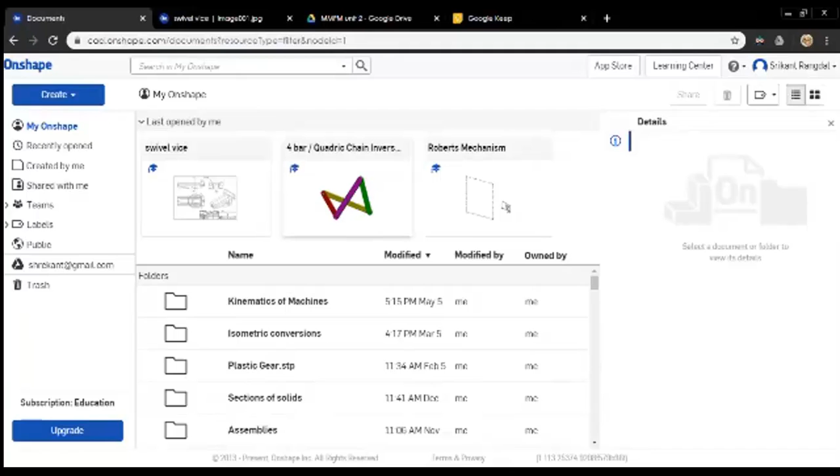But later on, since AutoCAD is not a parametric software, the students were unable to move these mechanisms and see how they move. That is what put me on a journey to discover better methods and software that are not only capable of showing students how objects behave in 3D, but also allow them to interact with it and model with complete functionality wherever they want.

And that's how I came upon Onshape. Now, Onshape is a software developed by the same people who developed SolidWorks. They left SolidWorks - Dassault Systems is the company which developed SolidWorks. So these people actually worked for Dassault Systems developing SolidWorks before they left the company and started their own venture, called Onshape.

So this is the software that you can see. I have opened a small model called a 4-bar mechanism. Now in the textbook, this 4-bar mechanism is shown by 4 sets of lines joining at corners. But the students are unable to see how to operate it - that's where this software comes to our help.

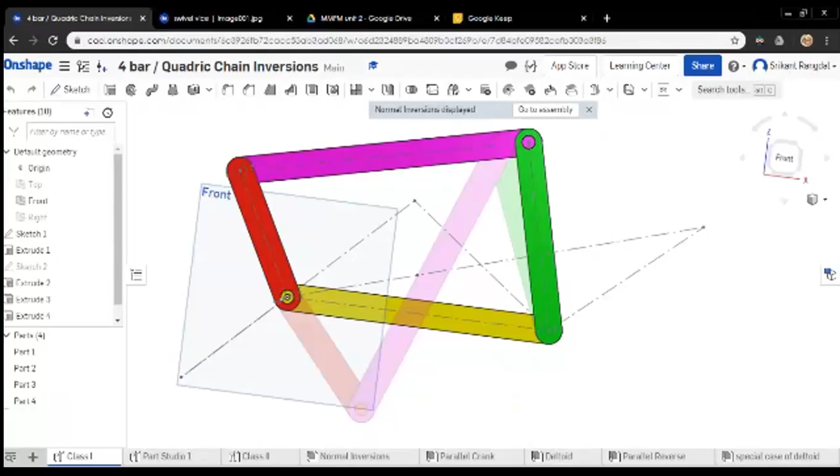I think in the video it's not clearly visible - the names are not visible, but you can make out where they are on the screen.

If you make an account, similar to making a Gmail account, just by filling a small form, you can go to onshape.com and sign up. You'll be presented with a form to fill, and a free account for Onshape will be created for you. There's also an app you can use on mobile, downloadable from the Play Store or Apple's App Store, and you'll be ready to use the software on mobile as well.

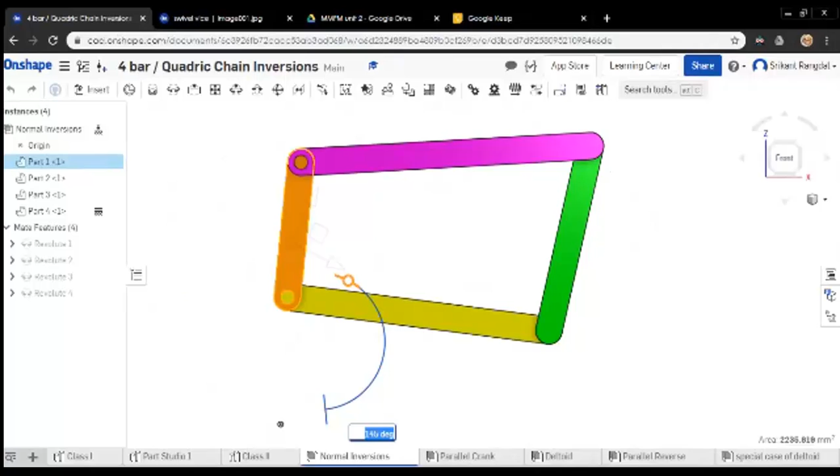So let me go ahead and show you how this mechanism can be operated. One of the links, the yellow one which we can see here, has been fixed, and the other links can move. I just have to select one of the links and start rotating it. The students can operate this mechanism very easily on their desktop, laptop, or mobile.

Near the end of this webinar, if possible, I'll open it up on my mobile and try to show you how it functions there as well. For now, we'll proceed with the desktop version.

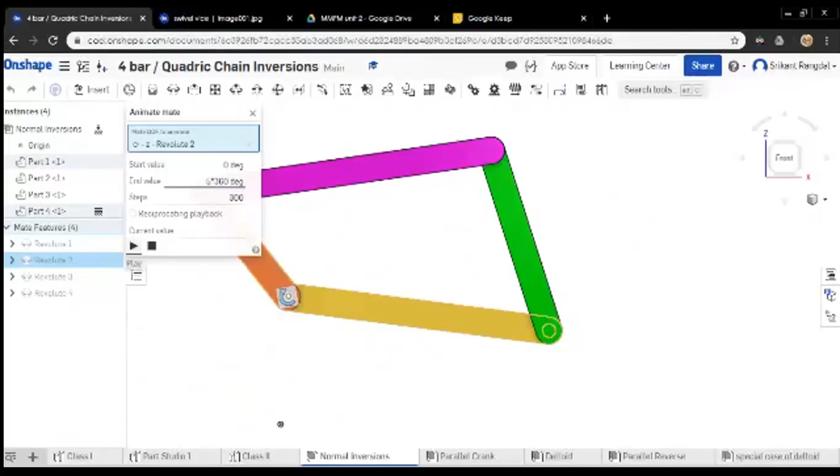So you can see the motion, how it is operated. You can also make it happen automatically - if we right click here, there will be an option called animate. If I give some inputs and press play, the mechanism starts functioning automatically, and the student doesn't have to operate anything any further. So this is one way to see the animation.

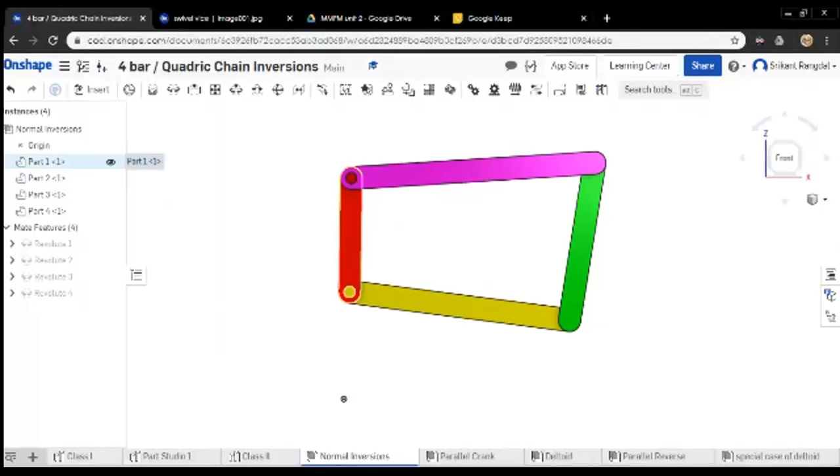Now let us look at another inversion of the same mechanism. If you are good with kinematics, you might know that the same kinematic chain can provide us with 4 different inversions, each having unique capabilities. So if I want to change it to a different inversion, all I have to do is change the fixed link. I have to unfix the yellow link and fix some other link instead. Let me fix the red one. And now if I animate it...

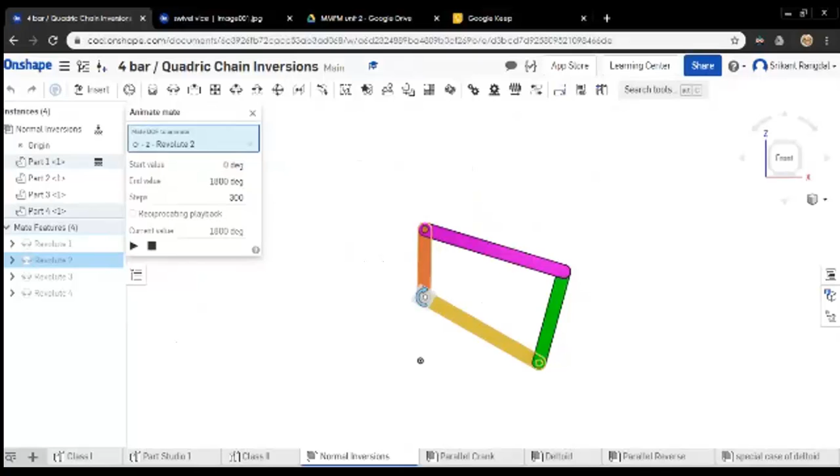I'll have a completely different kind of mechanism available to me. The links that I have used are the same. There is no difference in the dimensions, and no difference in the kind of links or joints that we have provided. But with the same links and same joints, just by changing which link is fixed, you will get different inversions.

So just by fixing another link instead of the previous one, you get the different inversions. Now this is a very simple one. Even though students are able to understand it, most of my students felt a lot of difficulty understanding some of the special cases of mechanisms, like the parallel crank, which is much simpler. Let us go for another one, called the deltoid linkage. This is the one most students felt a lot of difficulty understanding. So this is the one.

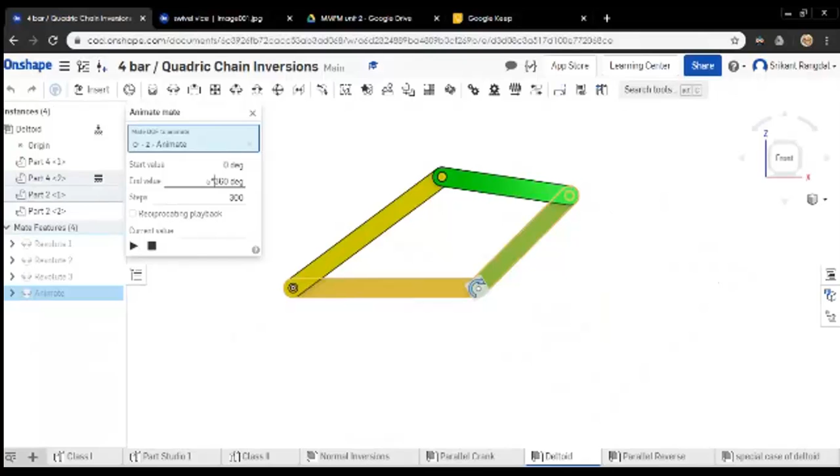Let us try to see it in animation. When we see this in animation, you can see how the mechanism is moving. Even though textbooks try to explain this by putting up diagrams, students find it difficult to understand how the mechanism actually moves. So by using this Onshape, you can see on the screen how easily the motion of this mechanism can be shown to the students.

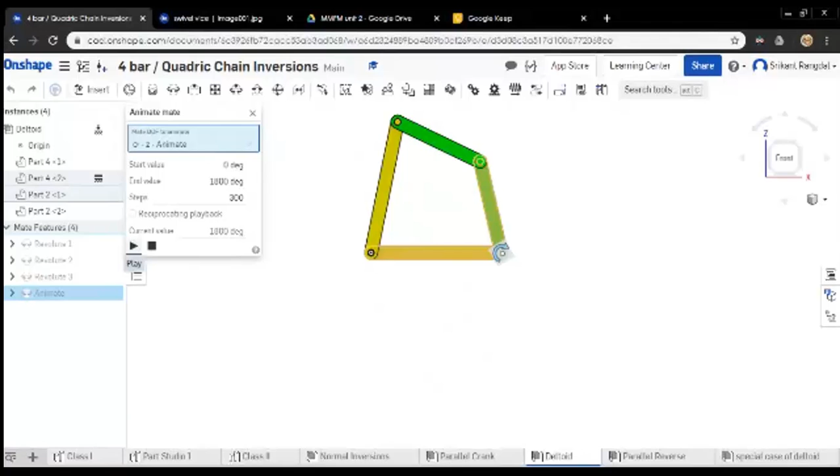Now imagine if the same mechanism is available to each and every student in their pocket, wherever they are going, and they can open it up anytime while walking, while going in the bus, or just sitting to chat, or whenever they find time, and just try playing with it. Not only will their imagination develop, but they will have a much better understanding of these mechanisms by seeing them in their complete functionality, rather than just looking at one or two diagrams and trying to imagine how they might function.

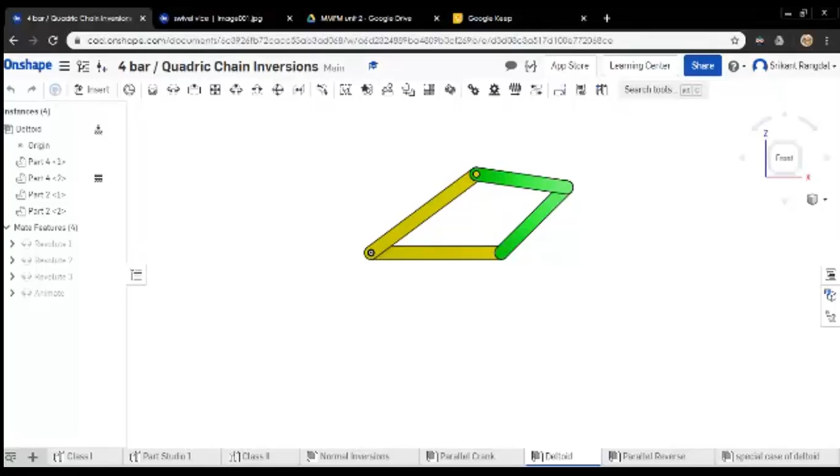So this is one of the examples, a 4-bar mechanism. There are many such mechanisms that I have created in kinematics in Onshape, and I have kept them ready for the students. So whenever I go to class, I just share these mechanisms with the students. They can open it whenever they want and take a look at them. So two more such mechanisms I will be showing a demo for right now.

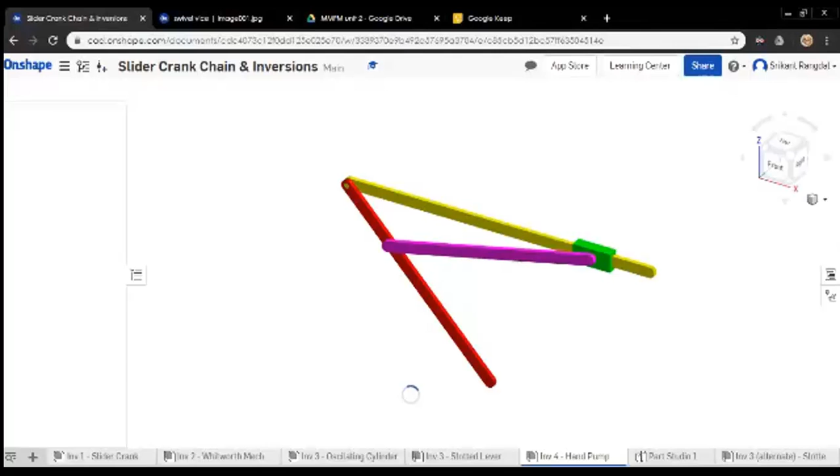Let's next go for a little more complicated mechanism, the slider crank. Now the slider crank mechanism, as you might know, has a slider, a coupler, and a crank. This is the first inversion, the simplest one, wherein the yellow link will be fixed, and you can see the animation of how it operates.

You can see the red link, which is working as a crank, rotating a complete 360 degrees. And the slider, which is the green part, is sliding over the yellow one. The coupler is the one ensuring constant distance between the other side of the red link and the slider. So this is the first inversion, which is pretty easy to understand.

Let's now go for the next one. Speed of the animation can be controlled by using a value here, called the steps. Right now the steps are 300. So if I want it to be slower, I can increase the number of steps.

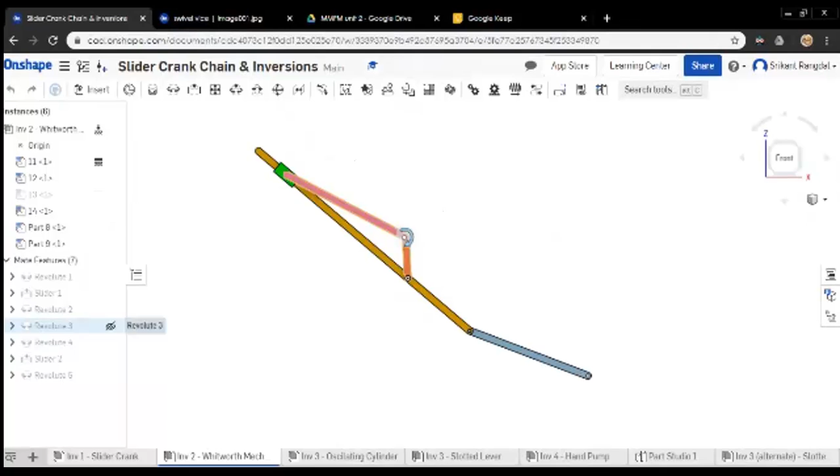So let's animate it. As you can see, the starting angle is 0 and ending angle is 360. If I want to rotate for more angles, I just multiply by 5 here. It may not be visible to most of you, but you can listen to what I'm talking about and try to understand it. So when I play the button, it starts moving. This last link, I wasn't able to constrain yet. It's still a work in progress. I'll have to do it later.

Let's go ahead for the third one. This is called the oscillating cylinder mechanism. The pink link is the fixed one. Let us now try to animate it.

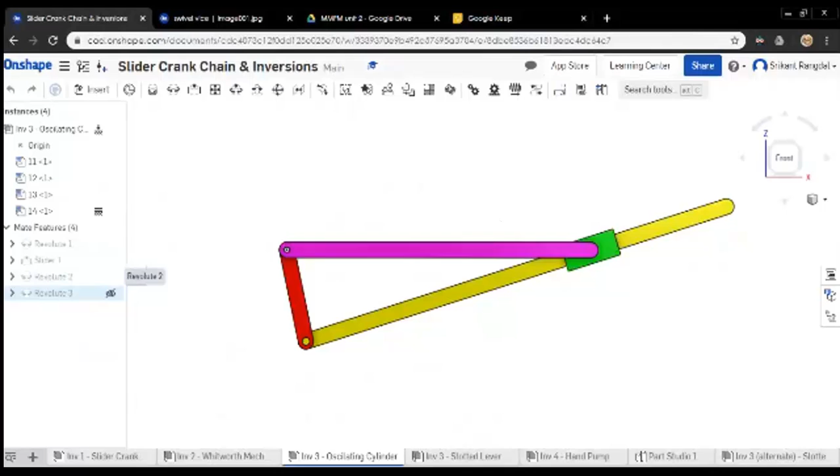Just multiply 5 times for 5 rotations. Here you can see this green slider, which represents the cylinder, is oscillating at its own point, and the red link works as a crank moving around, while the yellow link is just sliding inside the oscillator.

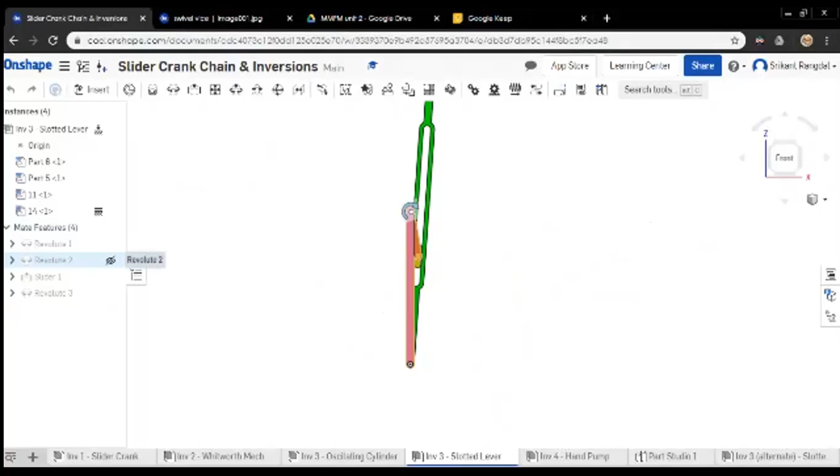The last one is a special case of the oscillating cylinder mechanism, called the slotted lever mechanism. Let us have a look at it in animation as well. So this is how the motion occurs.

Here you can clearly see that even though the red link is moving at a constant speed, the oscillation happening on the green link is not constant. While moving forward, it moves very slowly. While moving back, it happens very fast. So this is why it is called a quick return mechanism.

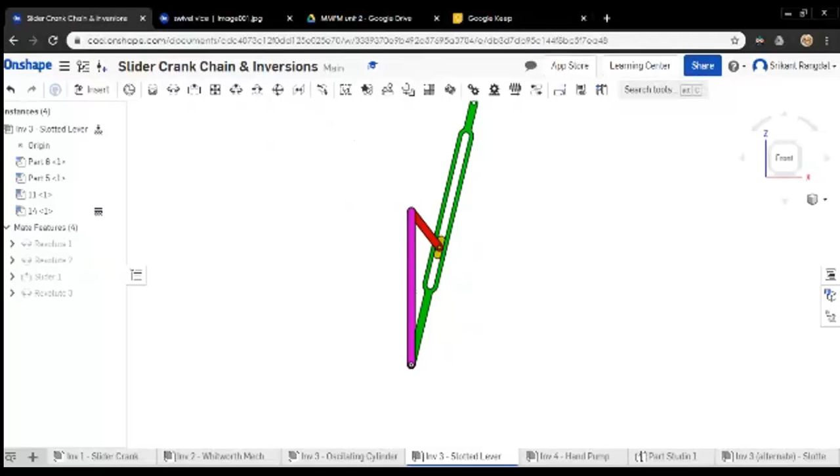Instead of just showing a few diagrams in the textbook and explaining how they function, if students actually see the mechanism in action, I think they can have a better understanding of how it functions. They can also extend this mechanism further to create their own creative mechanisms that could be used in machineries they might want to design themselves.

Now, on all these inversions, the basic structure, the length between the joints, has been the same, whereas some slight modifications have been provided to some links to get additional working benefits. I think the software makes it much clearer how the mechanism functions and how the different linkages are modified so that the functionality becomes very easy to observe.

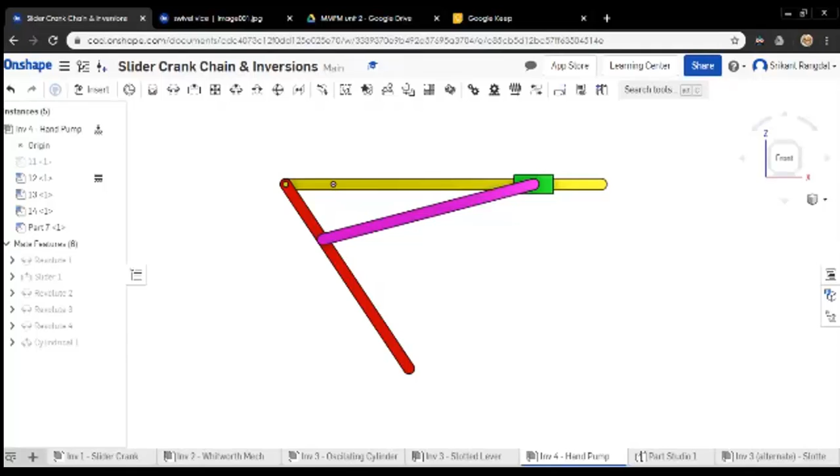Let's now go to the next one, which is much more challenging for students to understand, and that is the double slider mechanism.

Now, the first inversion of this double slider mechanism is called the elliptical trammel. You can see the green part has some slots inside, and there are two sliders which can slide inside these two parts. This is how they have been designed and constrained properly.

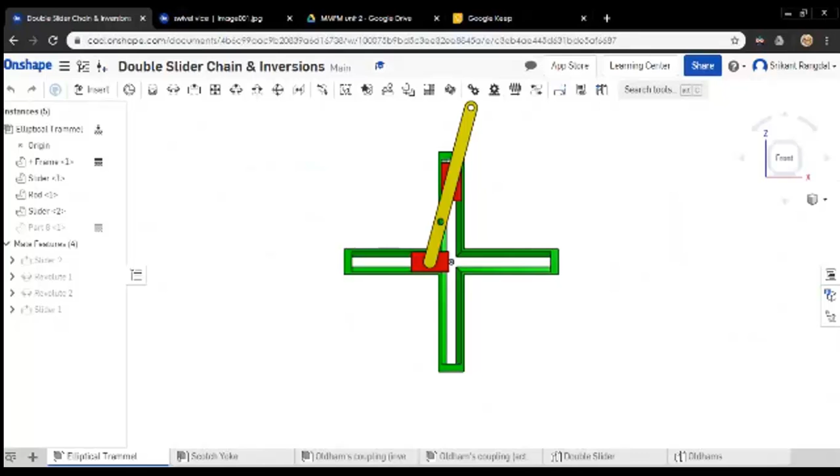So let us see how this functions. I can just drag it on the screen by holding it with my mouse with the left click. Or if I wanted to rotate with constant speed, I can go to the menu on the left side, click on animate, provide the angle by which it should animate and the number of steps it will take to animate, and just click on the play button.

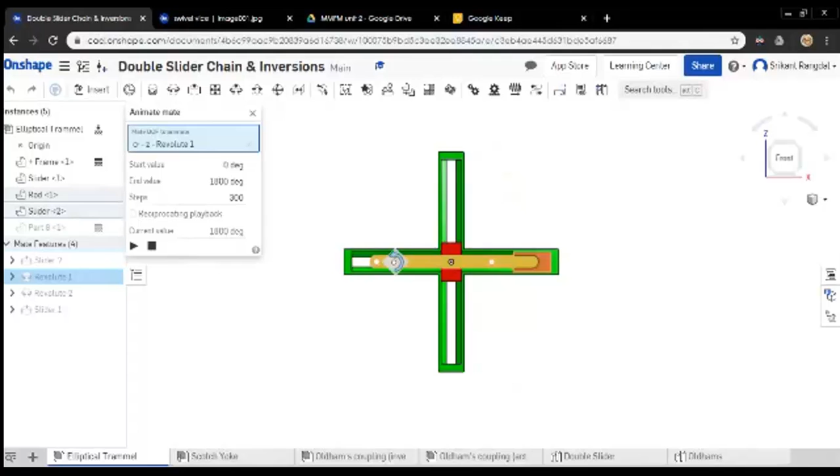And it will start showing the animation. So this mechanism is almost simpler, and many people were able to make physical models of this also, and their videos are available on YouTube for students to see and learn from it.

The challenging part is the last inversion, called Oldham's coupling. As a student, whenever I observed an Oldham's coupling, I used to wonder how this mechanism, which looks so different from the double slider mechanism we see around here, the elliptical trammel, how can that be an inversion of the same mechanism? This was a doubt that always kept me thinking.

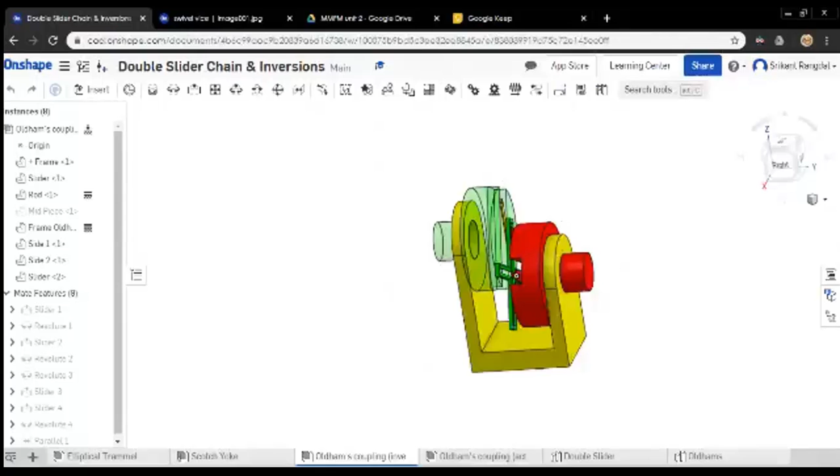With OnShape, I was finally able to make the students understand, not only the students, even I myself gained a lot better understanding of how this completely different looking mechanism is an inversion of the same mechanism we are learning, that is the double slider mechanism. Let us see how this mechanism functions as well.

Just animate it. 5 rotations and 300 steps.

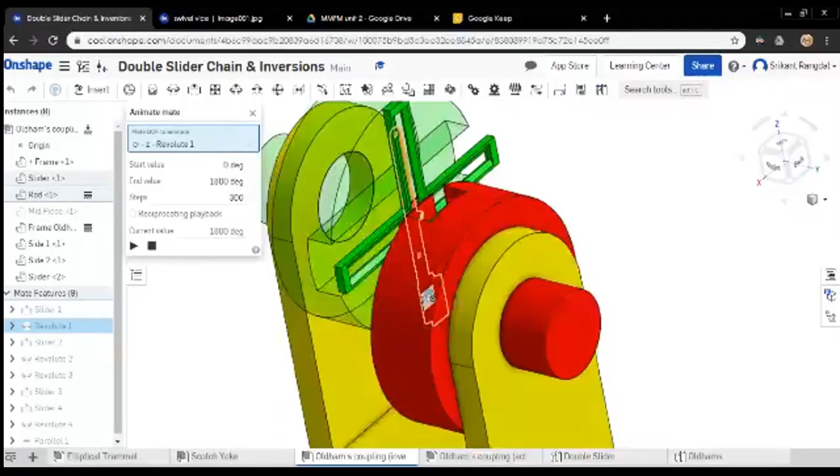So here you can see that I have placed an elliptical trammel, that is a double slider mechanism, within the Oldham's coupling, even though that is not how it is shown in the textbook. This is done so that the student can understand how the parts are actually moving.

So the parts of the elliptical trammel have been constrained along with the parts that we see around here. For example, the red shaft that is rotating here has been constrained with the red slider that we see over here. So as this shaft is rotating, the same kind of motion is exhibited by this inner slider.

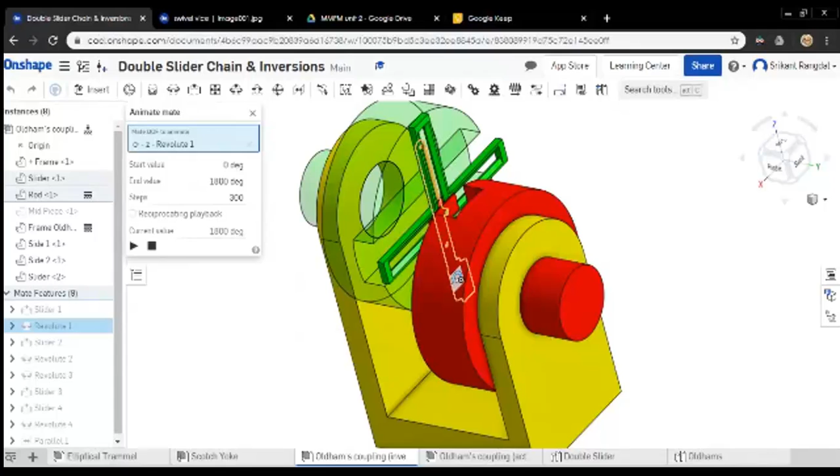And there's another slider which is constrained with this other shaft. So they both are complementary to each other. Whereas this fixed green link is complementary to the last sliding block, which I have hidden for now. When I show it, this is how it appears.

You can just hide the parts which I don't want to see. And here I have the Oldham's coupling without the double slider mechanism.

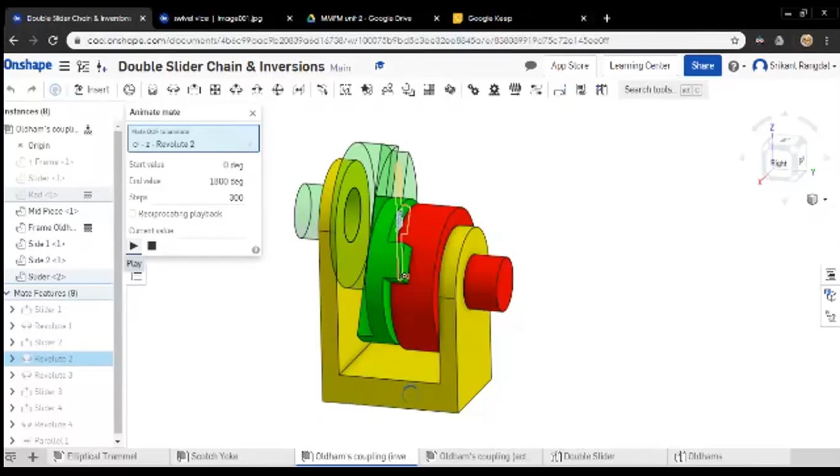Let's just take a look at it, how it rotates before moving further. I'll animate it for 5 rotations and I'll play it. So you can see while it is rotating, you can also rotate and watch the mechanism from different angles to check out how the mechanism is behaving.

I have turned one of these links slightly transparent so that you can see from inside how the mechanisms are locking over to each other. So this is an Oldham's coupling.

As you can see, almost all the different kinds of mechanisms can be built here in OnShape, and you can watch them live in action interactively on your mobile or on desktop, so that you get a much better understanding of how these models are behaving.

Of course, the same models, once they are perfect, can be supplied to the students, and using these dimensions, the student can actually make a physical model which can be kept in the lab for other students to observe. That's what is our plan.

That's what is our next plan. Once all the designs are ready, we will provide students with the task of making them into a physical model. And we will be calling them micro projects. Mini projects and major projects, they will be doing in the final years as usual.

But there is a requirement for something like micro projects, I feel, which will not only make the students grasp the subject knowledge and be able to attempt the question paper in the exams, but also gain that spirit of actually making the mechanisms physically and interacting with them.

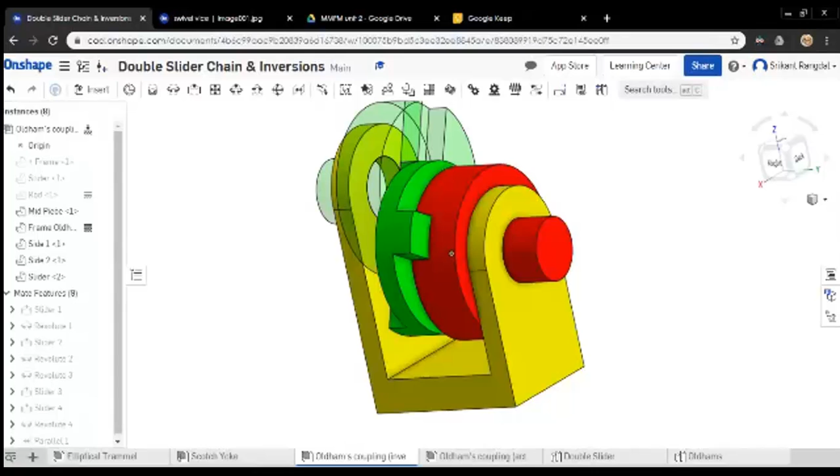Okay, so let us move ahead and let's take a look at some other mechanisms.

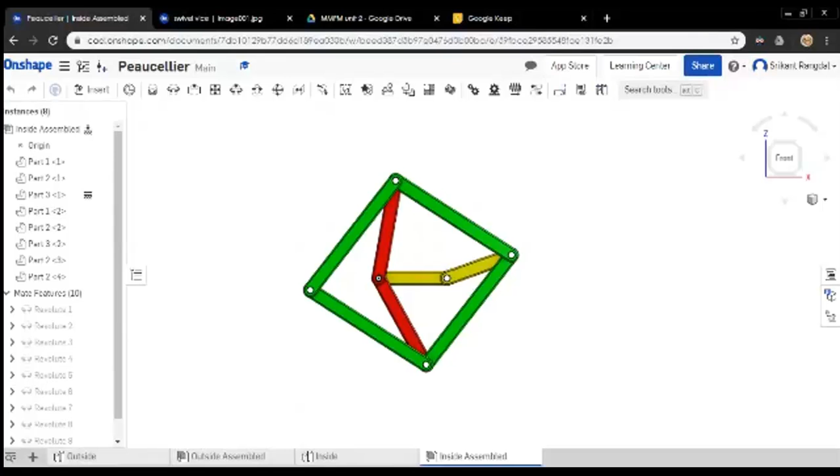So there are two versions of this Peaucellier mechanism that I'd like to show you. The other one is over here, the inside assembly. Now this mechanism, when you look at it for the first time, you may not think that it is a Peaucellier mechanism, but when you see it in action, you start observing that it indeed is very similar to the Peaucellier. In fact, this particular set of dimensions has an added benefit: we get a much longer straight line path when compared to the length of the path we got with this version of it.

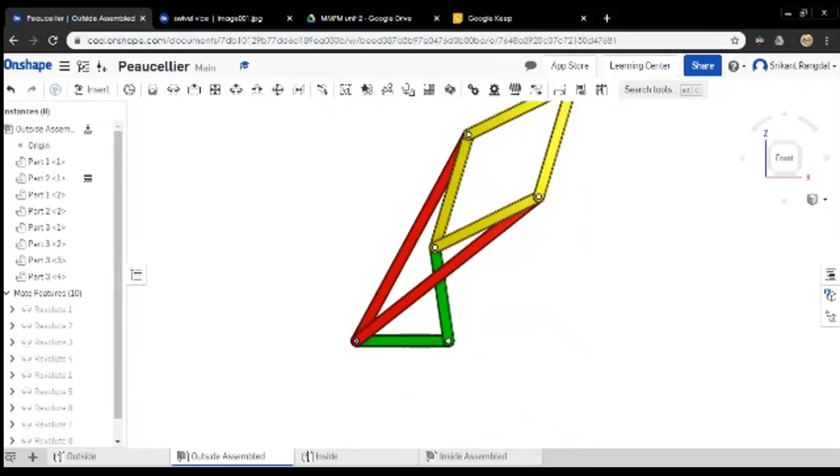The length of the linkages are very long, and the straight line path that we get has much more limit. This is the maximum extent to which we can go till these two points meet exactly - that's the maximum for this mechanism. Whereas here, you can see that the reach is much more compared to the length of links that we have around here.

So students can experiment with different lengths of linkages while maintaining the minimum requirements of making the Peaucellier mechanism, and see how the motion, its limits, and its functionality vary when they change the different dimensions. This kind of experimental way of learning, I feel, is a much better way of dealing with engineering studies than merely going through books and attempting questions in a 3-hour session at the end of a semester.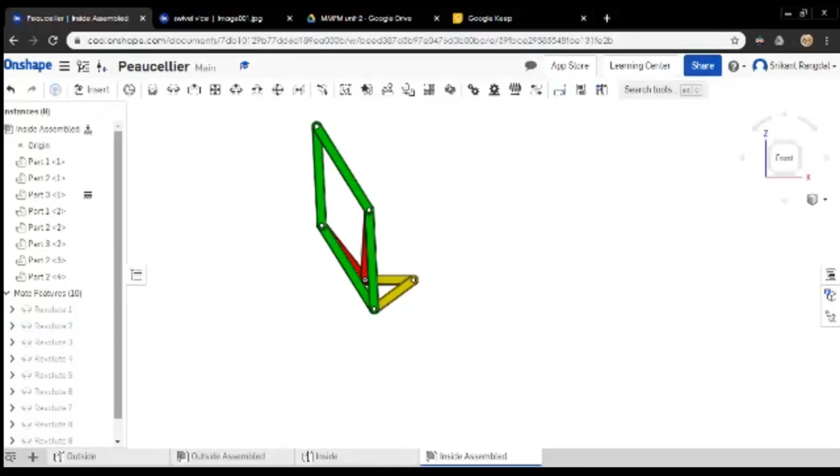So next, there are many such simple straight line mechanisms that I have done. One such is the Hart's mechanism. So this one is a Hart's mechanism. This is again an exact straight line mechanism.

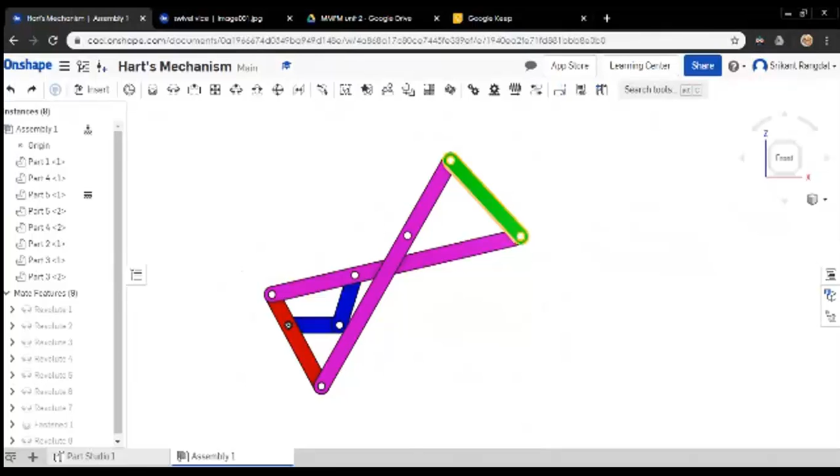And you can see how the motion of this linkage happens. This point that we see around here, the center of this circle, is what is moving in a straight line that is perpendicular to this line which is extended. Let's have a look at it once again. You can see that the line is tracing almost a straight line, an exactly straight line. And also for this, we have a proof in the textbook which proves that geometrically, at any given position, this point always is on a straight vertical path.

So this was how the students can analyze the different mechanisms and try to understand them in different light. The second point I'd like to point out is the analysis part - where students have to find velocities and accelerations of the different linkages with the help of diagrams.

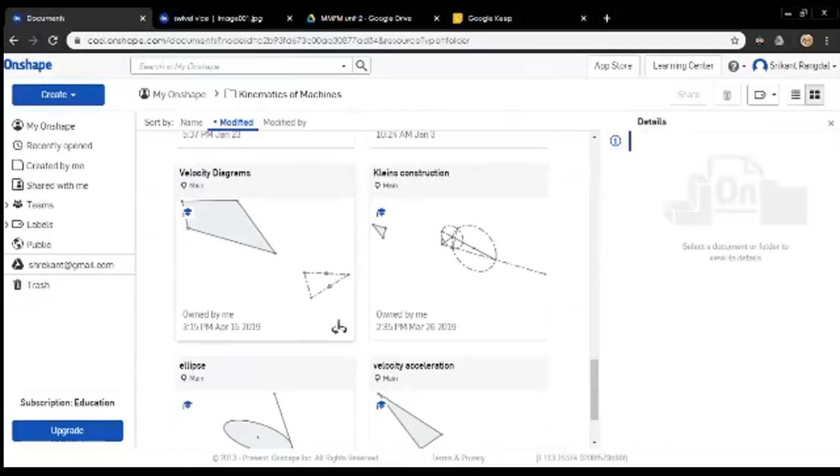Now let us take a look at this velocity diagram. We'll just go to edit sketch. Now this has not been made into a complete mechanism - you can see that it is still just a sketch. For this sketch, I have provided some constraints, the dimensional constraints, as well as some other geometric constraints. And when I'm moving this mechanism, you can actually see the velocity diagram dynamically moving, providing us with the velocities at each given position.

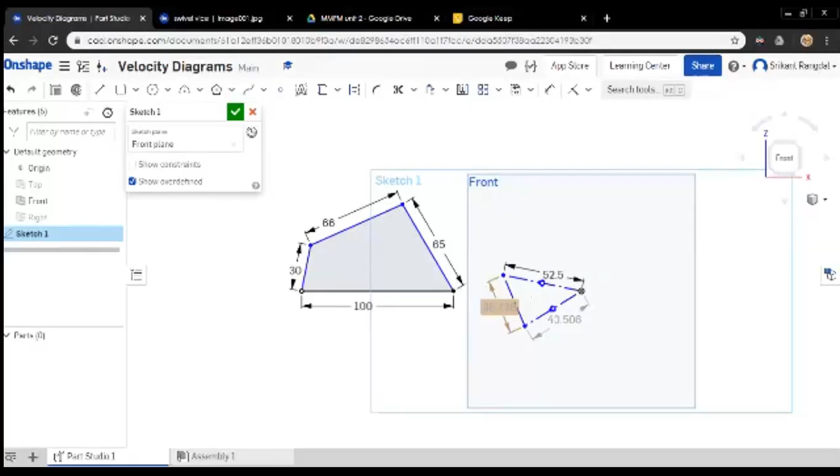So if you want to find the velocities at a particular angle, all we have to do is take dimensions from the toolbar and select the two links between which we want the angle. At this angle, we just feed whatever value we want - like I'm feeding 50 degrees for now. As soon as I feed the angle, the position will change to reflect the 50-degree angle, and the velocity diagram here will automatically take shape, giving us the velocities of the other points we want to find out.

So this way, dynamically, at different positions, we can analyze the velocities. Not only velocities - if we are able to build an acceleration diagram and constrain it properly using all the rules, we can also get a very good look at how the acceleration will vary at different positions.

So one of the assignments that I like giving to my students is to give them a problem and ask them to analyze the variation of velocities of another point anywhere on the mechanism, either using the mathematical or algebraic way, or by going into the software, building the sketch properly, noting the velocities down at different positions, and trying to connect that graph using a smooth curve.

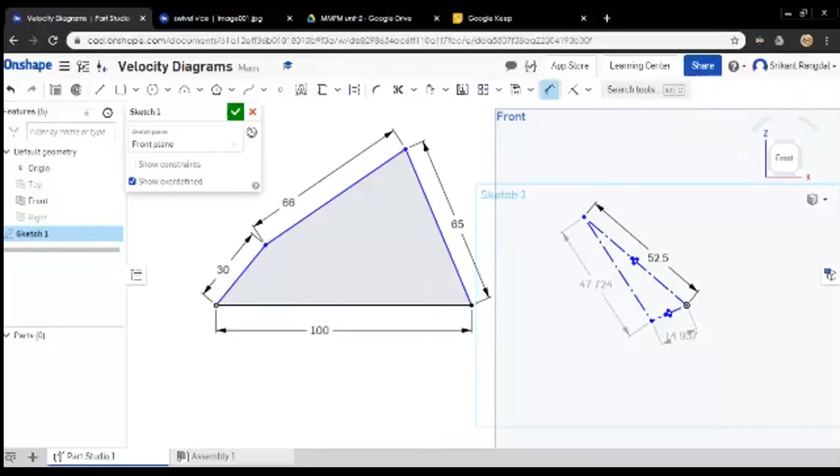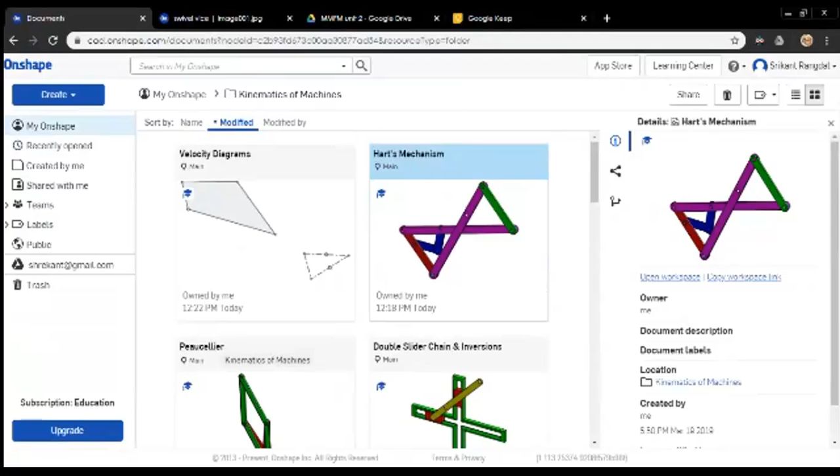There is one last thing I'd like to show here. This is something I learned very recently, and I was in fact much more in doubt about it, only after creating this mechanism in the software was I able to understand it properly.

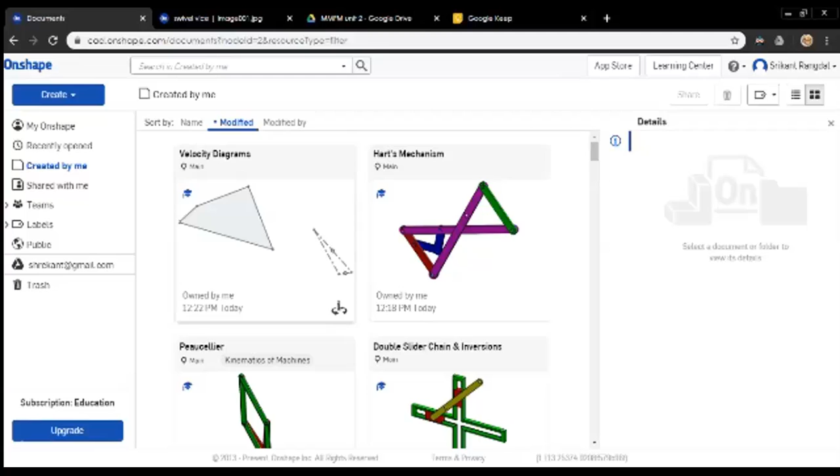There's something in the syllabus of Osmania University students called Roberts Law. Even though we have the Roberts straight line mechanism in almost all universities, Roberts Law is something I myself didn't study in my student days, and even while teaching students in JNTU, I never came across this law. But when I was teaching the Osmania University students, that's where I came across it for the first time.

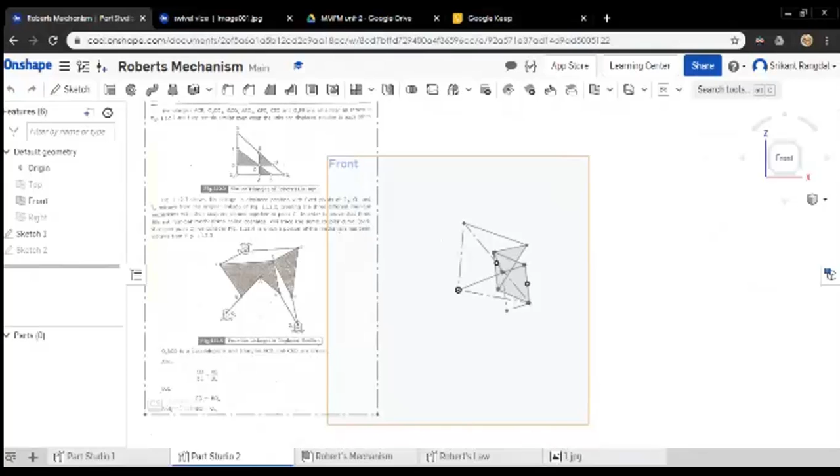The law was very difficult for me to understand, and the standard reference books were not able to help me much with this particular law. Luckily, a local book which provided solutions to previous papers had a good enough explanation. You can see a scanned copy of it that I have uploaded to the software, and by taking this diagram as reference, I was able to build a rough mechanism of it.

And this is how it functions. It's actually very difficult to keep it operational for a much longer period of time, so I just try to move it slightly for a small angle.

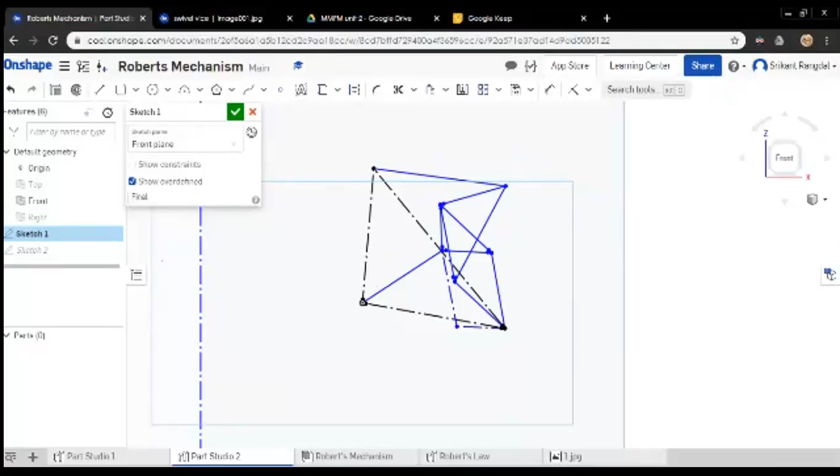Roberts Law tells us that the coupler curve - this link we have in a 4-bar mechanism is called the coupler, and any point on the coupler, the path traveled by this point is called the coupler curve. Now the textbook allows us to algebraically derive a formula and calculate the coordinates of this point as the mechanism takes different positions. What Roberts Law tells us is that the same coupler curve, any coupler curve defined by any given 4-bar mechanism, can also be exactly traced by 2 more such 4-bar mechanisms.

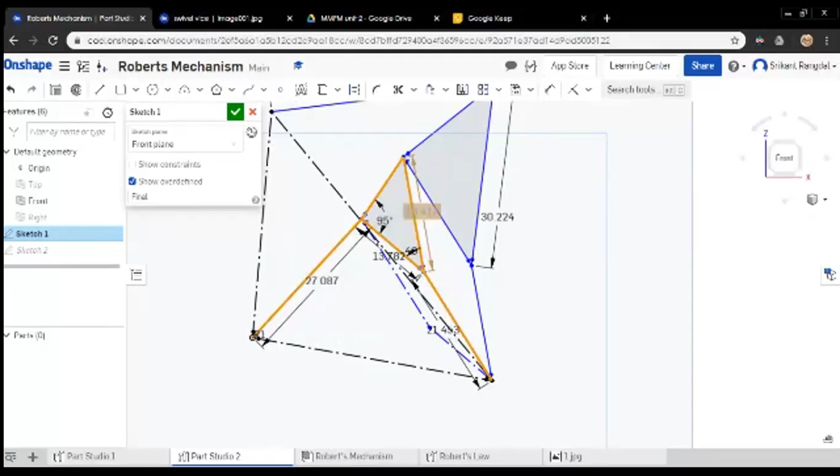When you try to see the definition itself, it's slightly more confusing, but here is what it means. You can see this set of links - they define one of the 4-bar mechanisms, this is the first 4-bar mechanism. This triangular element over here is called a coupler, because it's like a structure and no 2 points on it can have any relative motion with respect to each other. Now the path traveled by this point is called the coupler curve - the path on which it is moving.

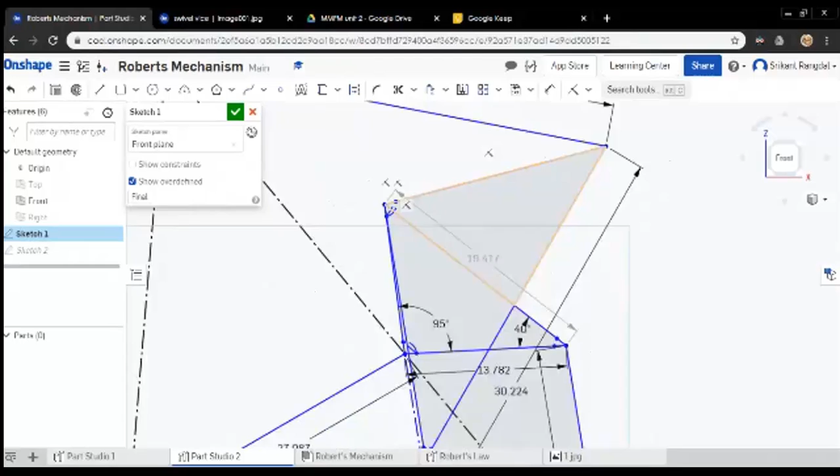Now there is a second 4-bar mechanism which I am highlighting. This highlighted set of links forms the second 4-bar mechanism, and in this mechanism also all the links have been constrained properly. Now when I'm moving this linkage, this point that you see is shared commonly by both the mechanisms. And you can easily see that the same path is traversed by both the linkages.

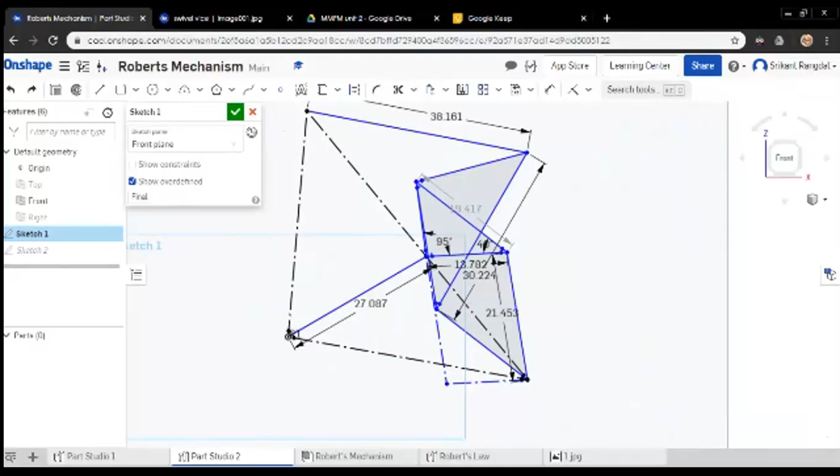Similar to this, we can have one more such 4-bar mechanism using these 2 points - using this and this, we can make one more set of 4-bar mechanism that will definitely follow the same coupler curve. So this is a much more complicated mechanism. There is also a simpler set of mechanisms that you can see around here.

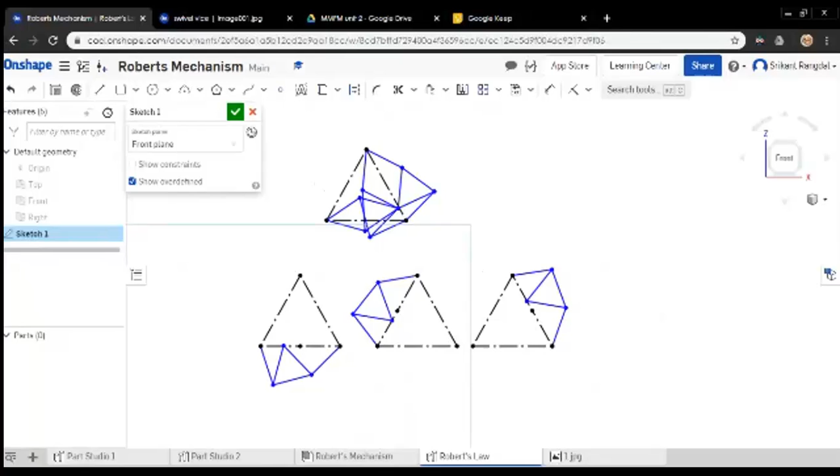So this is a much simpler version of that same mechanism. You can see I have made this using an equilateral triangle, and the path traversed by this point is the path of the equilateral triangle. It will not follow that exactly because the Roberts mechanism is not one of the exactly straight line mechanisms, but

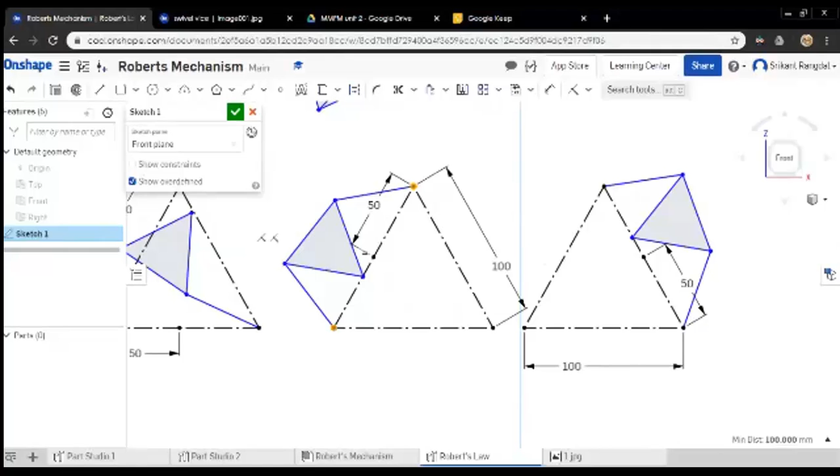it will approximately try to trace the same path. So this is one of the 4-bar mechanisms, taking these 2 points as the frame. Now the same mechanism, if we take a different set of fixed frame, this is how it will behave. So you can see here, even this mechanism is traveling along the same equilateral path. There is a third mechanism also that's moving along the same here.

And the path traveled by this point in all 3 mechanisms will coincide, is what the Roberts law tells us. So that's what I have tried to put together over here. It's very, very complicated, so when it starts moving, you have to keep your attention very concentrated to make out 3 different mechanisms.

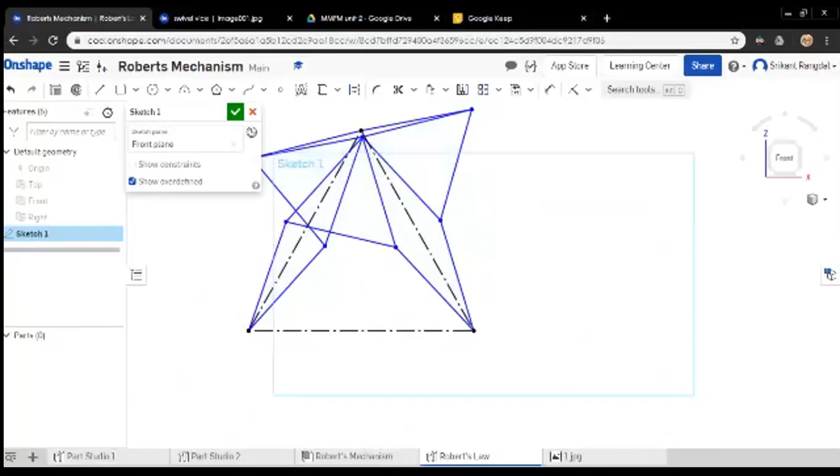Okay, so this is how it's moving. Let's move it straight down. Let's put this down. Okay, so this is how the point moves.

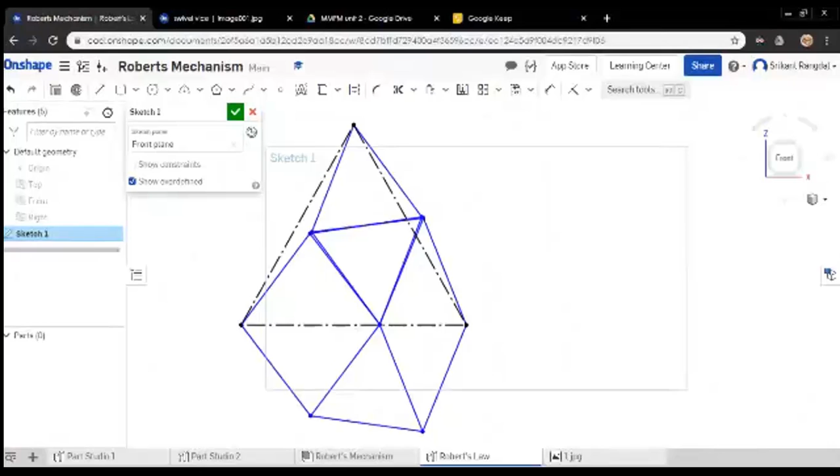So this point, if you see, the 3 points located on all 3 mechanisms, I have constrained them with coincidence, and still they're able to move independently, which means that the path traversed by the coupler point is exactly the same for all 3 mechanisms.

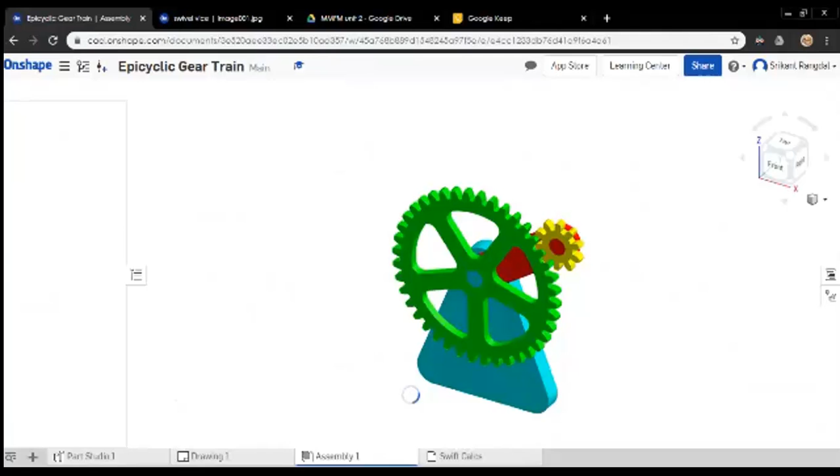So this is another of the topics which students find a little difficult. Actually, it is one of the easiest topics when it comes to the exam point of understanding and being able to solve problems, because once understood, the questions can easily be solved by just using a simple table which is given in the textbook. But again, when it comes to imagining how the object actually functions, that's where students face a lot of difficulty, and that's where the software can help us visualize it in a much better way.

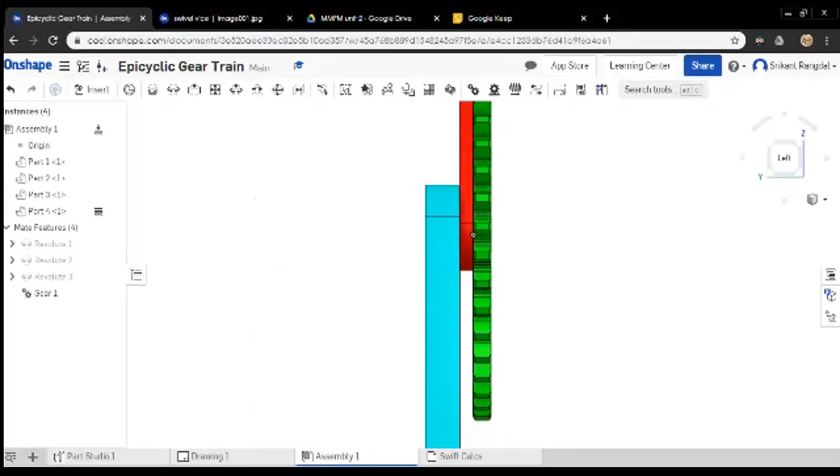So you can see here that this part, the blue one, is the frame, and the red one is called an arm. The arm is freely rotatable about the same point. In 3D, this is how it is arranged. First of all, we have the blue part. Then in the middle, we have this arm for some thickness, followed by the green spur gear, which is at the topmost. And this arm has

a pin like this at the other end, which allows another smaller pinion gear, called the planet gear, to be placed on it. So not only is the green gear able to rotate, but independent of this motion, the arm is also able to rotate. So this is the kind of motion that we see around here.

So the number of degrees of freedom that we have here is actually 2. So in the exact sense, according to the definition, it's not exactly a mechanism, but more like a kinematic chain. And out of this, we can get different inversions by fixing different links.

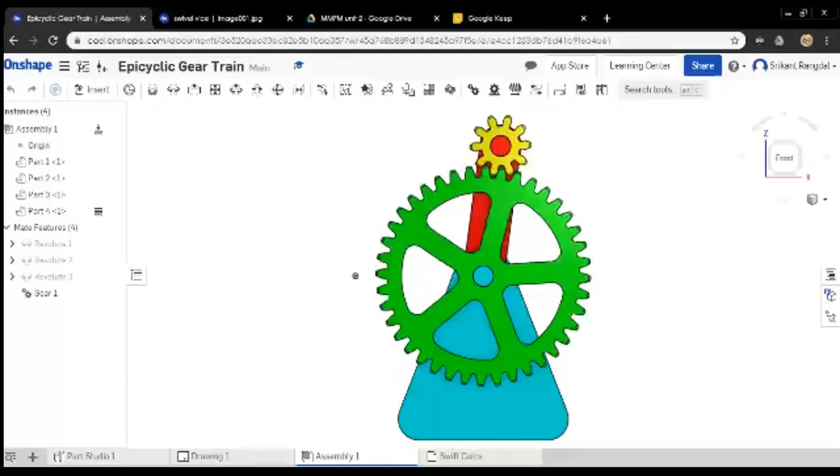So by fixing this inner gear called the sun, we get one of the inversions. Similarly, by fixing the arm, we get another of the inversions. When the arm is fixed, you can see that these two gears behave as if they are simple spur and pinion gears, whereas

when the inner green link is fixed and the red link is allowed to rotate, yeah, the red link is allowed to rotate, this is the kind of motion that we see.

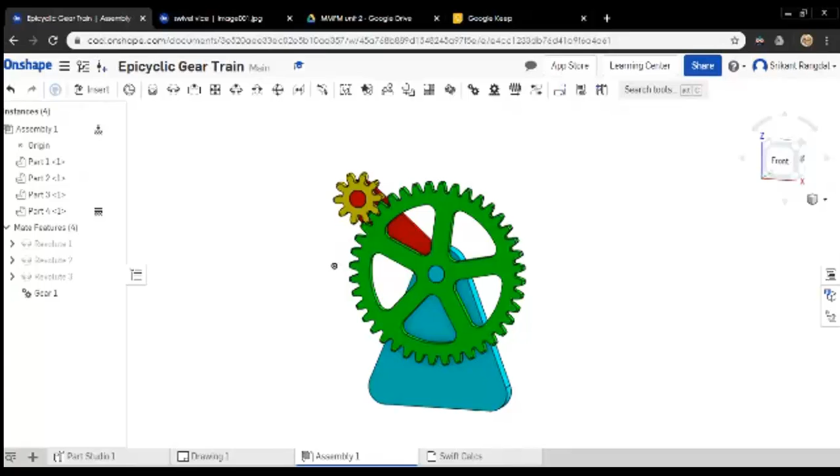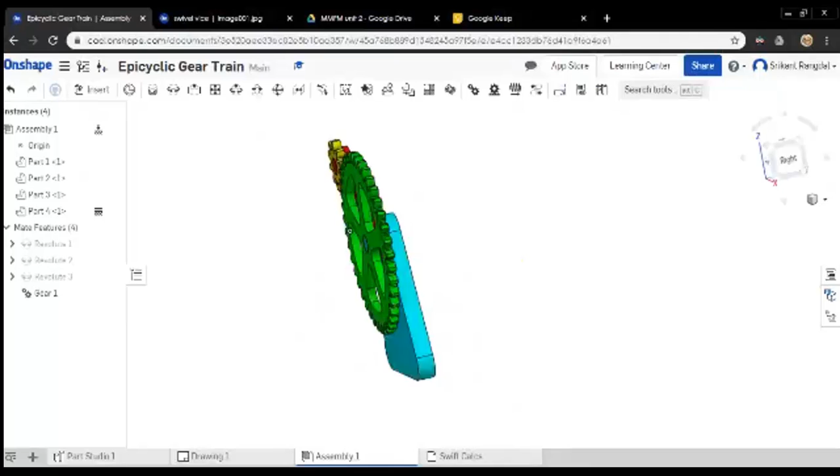So this is just the first set of mechanisms that I built, and as usual, this is still a work in progress, and I'm developing it further by trying to introduce the annular wheel. For every problem that we are facing in the textbook or in previous exams, I will definitely try to make a mechanism for that, and I'll be solving those problems as well in the future.

So this is the epicyclic gear train that I wanted to talk about. I think we still have a lot of time, so I'll go ahead and check out the constraints.

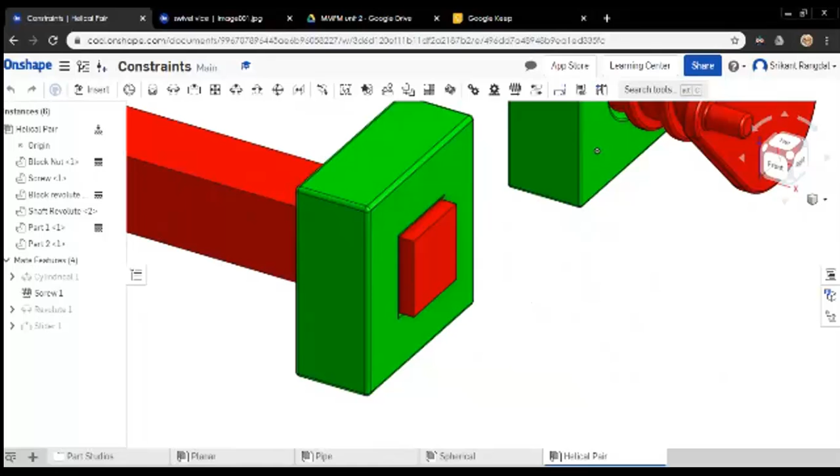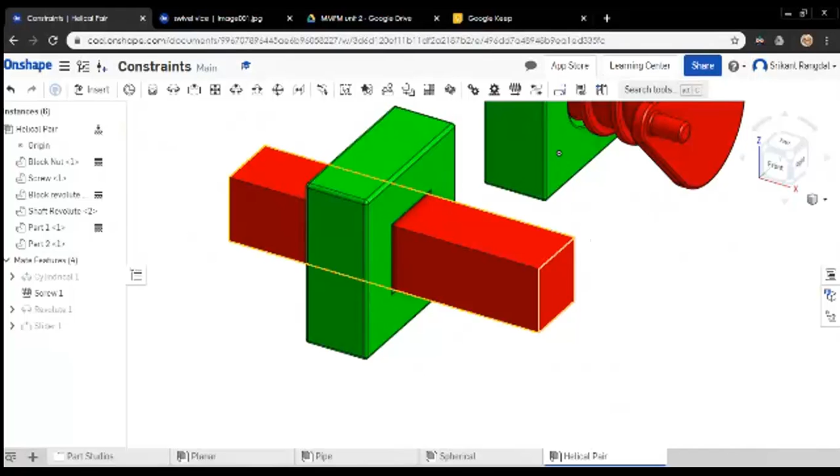The first one here is a joint with a single degree of freedom, called the sliding joint, or you can also call it the prismatic joint. You can see that this red prism can slide freely inside the green frame that is fixed. So there is only 1 degree of freedom, that is to and fro motion. It cannot rotate about this axis, or about this axis, neither can it rotate about this axis. Neither can it move along any other direction than this forward and backward motion, neither up and down nor sideways. So 5 degrees of freedom for this link have been constrained, and only 1 degree of freedom is free for it, that is forward and backward motion. So students can get to understand the 6 degrees of freedom very neatly here in this software.

So this kind of visual representation of the degrees of freedom is not as refined as we find in this Onshape when compared to any other CAD package. And that's one of the important things, one of the things that attracted me to this software to begin with.

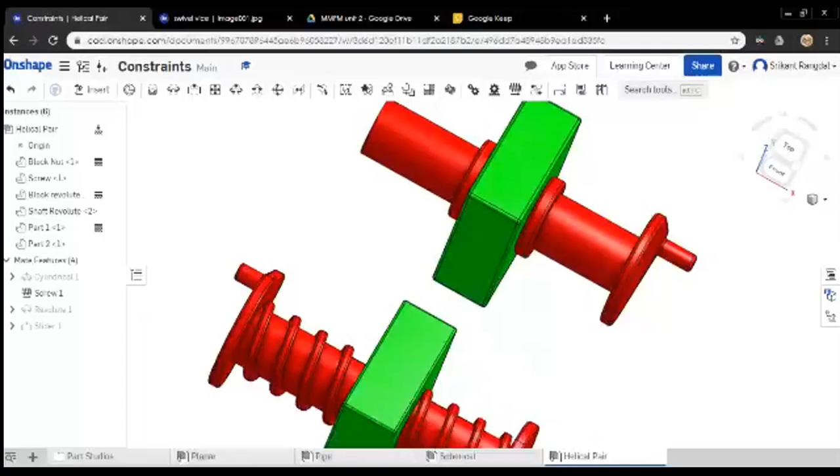Let us go for this one next. So here you can see there are some collars on both the sides so that the link cannot move back and forth. If you just hide this, this is how the mechanism looks like. So there is a hole of this shape, and there are 2 collars on the 2 sides. And when the mechanism moves, it can only rotate inside this.

This joint, as you might know from the subject, is called a revolute pair. It can only rotate about 1 axis. Once again, when you see the different degrees of freedom, it cannot rotate about any other axis, it can only rotate about this 1 axis. The other 2 axis rotations have been constrained. Not only that, but also motion along all 3 directions, the X, Y, and Z direction, is also completely constrained.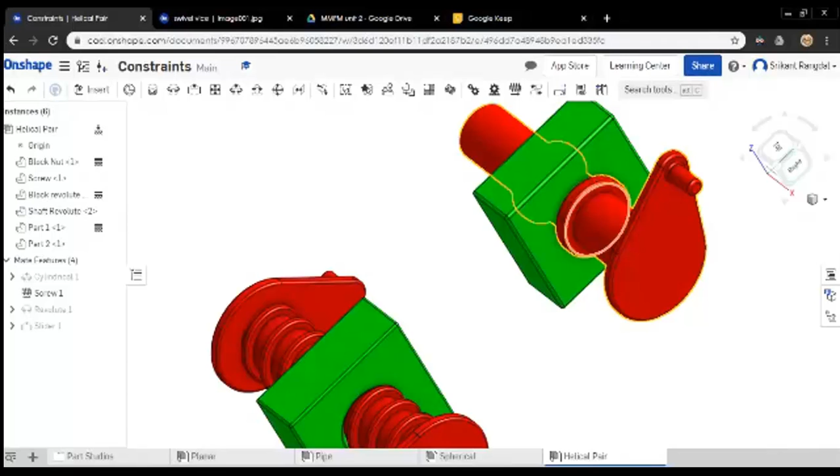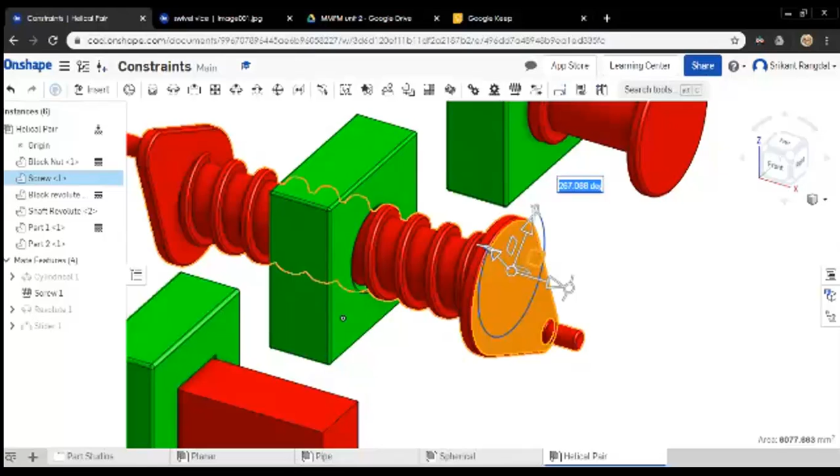Finally, coming here, this is a slightly tricky part for students to understand. A small part of the students always have this doubt that even though this particular mechanism can move in 2 directions, it can rotate as well as move inside and outside the green part. Many students almost always ask me in class, sir, even though this mechanism is able to move in 2 different directions, how come you can say it still has a single degree of freedom? My explanation always is that even though it can move in 2 directions, rotate as well as move inside and outside, these 2 motions are interdependent. They're not independent. So when it tries to move inside or outside, it has to revolve, and when it tries to revolve, it has to move inside and outside. Both these motions cannot happen independent of each other, and that is the main reason why even this mechanism is also called a joint with single degree of freedom.

So this is a comparatively very simple set of mechanisms. Now here you can see, if you have referred to Rattan, in that book he has tried to explore almost all kinds of joints.

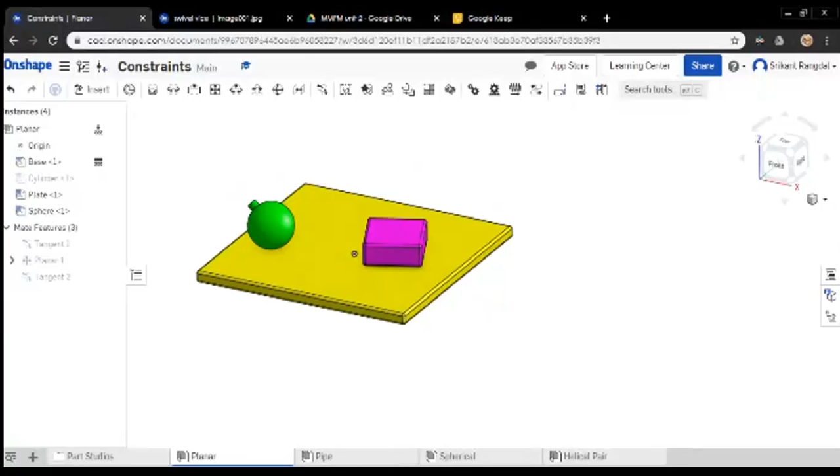There are a total of 6 degrees of freedom, and he has tried to reduce the degrees of freedom one by one by getting different degrees of freedom constrained at different points of time, to show how the mechanism actually functions. So this is what I have tried to do here. You can see a yellow platform, which is the fixed part, and on this top surface, in contact with it, we have these two linkages. Let us analyze the degrees of freedom of these linkages.

Coming to the green part first, let's constrain it properly. It can rotate about this axis, it can also rotate about this axis, and also about this axis. So 3 rotations, 3 degrees of freedom concerned with rotation are free. None of them are constrained.

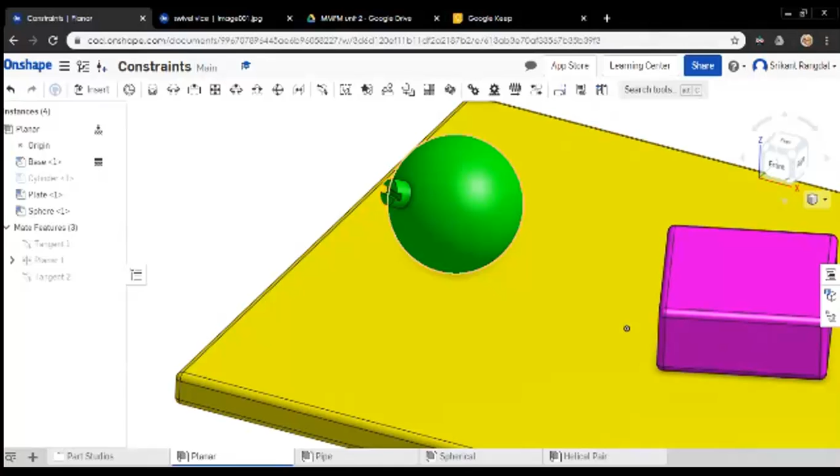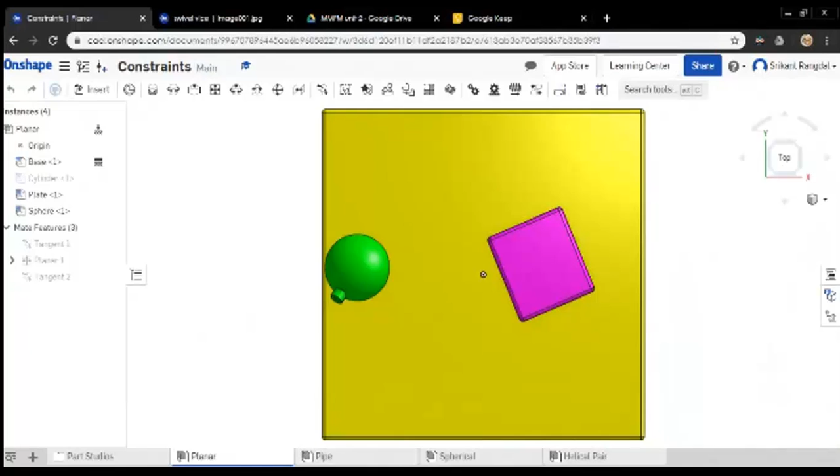Now let us see the degrees of freedom when it comes to motion, viewed from the top. This link can move up and down as well as left and right. But when you try to move it in the vertical direction, it's not possible, because it cannot break the contact point here, which is technically making it a joint. Because it cannot break this joint, it cannot leave the surface contact, since once it leaves the surface contact, it will no longer be a joint. So this joint between the yellow link and the green link constrains only 1 degree of freedom, that of motion.

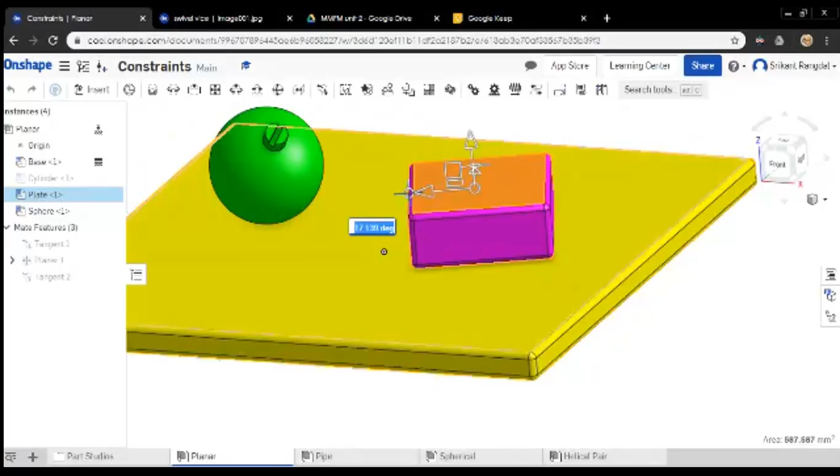Coming to the second one, here you can see a simple cuboid, the pink cuboid, and let us analyze what degrees of freedom are left for it. Rotation in this direction has been constrained, rotation in this direction also has been constrained, so 2 constraints already applied. Whereas it is free to rotate about this particular axis, so 1 degree of freedom in rotation is still there.

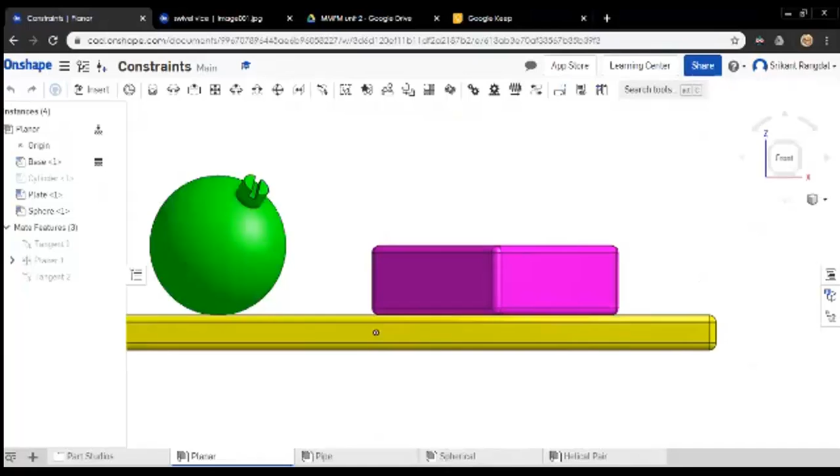Then coming to motion, just like the green part, it can move up and down. Let's have a look at it in the top view. It can move up and down, and left and right. But when we again try to separate the contact, it won't do it. It is moving sideways when I try to drag it upwards, but it is not ready to leave the contact, because once it leaves the contact, it's no longer a joint. So here 3 degrees of freedom have been constrained, and the joint still has 3 degrees of freedom left with it.

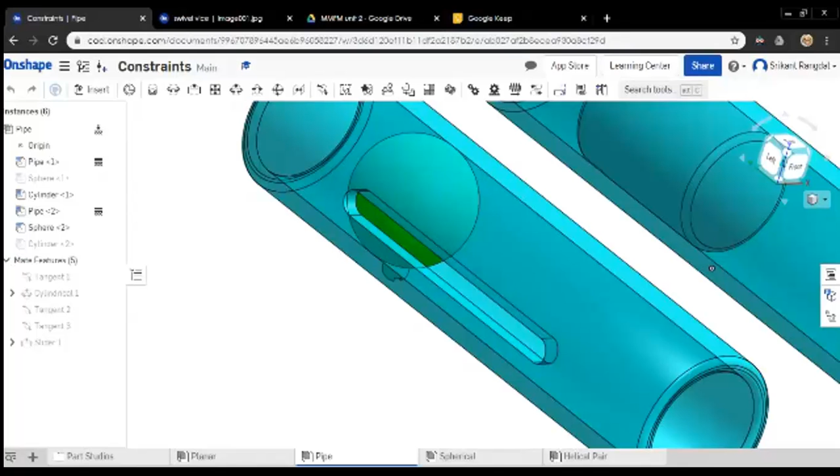This link here is almost perfect. You can see that it's able to rotate, it's able to rotate inside the hollow, and also it's able to move sideways. So this is another kind of joint.

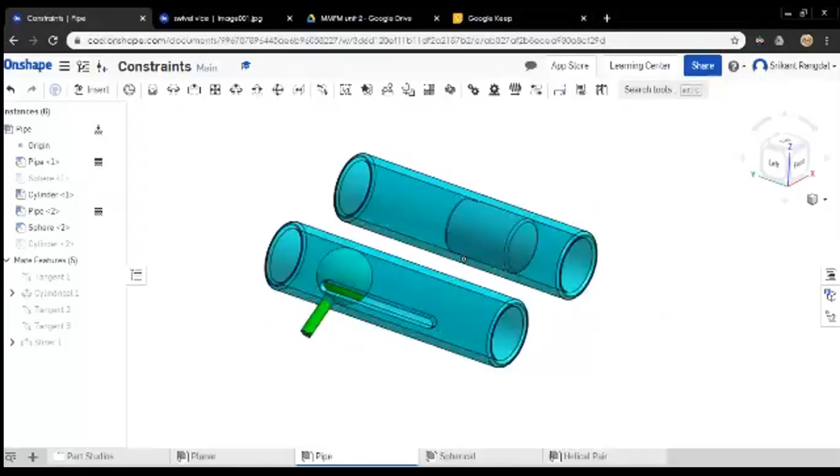There are many more joints. Here you can see the spherical joint, which has 3 degrees of freedom free when it comes to rotation, but all 3 degrees of movement have been constrained. Whereas here, 1 degree of freedom for rotation has been constrained, while it continues to have 2 degrees of rotation, and none of the movement degrees of freedom are free for it.

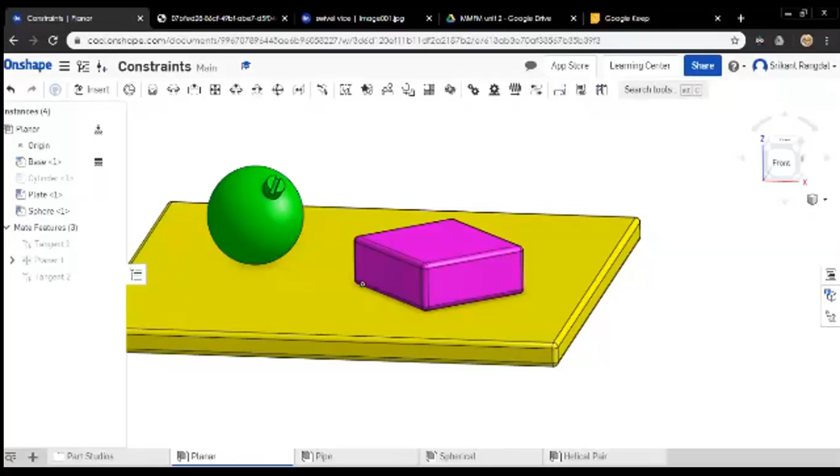And for the free version, how can we sign up, sir? You will always get a free version option when you are signing in. It's asking to sign up, but it's going for professional trial, showing the link first. It is directly connecting to professional. Yeah, the first option is professional trial, the second option is educational account, and there is a third option called public maker plan.

We need to sign up in the educational account, sir. That's the best for us. But we can use the same thing for our students too, to give explanations on this, no? Yes, definitely. Whatever models we create, we can share with the help of a link, so when you share the link, students can open the same model on their mobile and interactively check how it operates. Okay, thank you sir, that's it for my end.

I think there are no more doubts. Nobody is raising their hands.

Once again, I'd like to thank everyone for patiently attending this webinar. I hope you have all enjoyed it, and you will let more and more people come to know about this web series, so that in future we'll get more sessions like Srikant sir's. Any other doubts, they can mail directly to you, or subscribe to the YouTube channel. And please share the feedback with all the people; once we receive the feedback, e-certificates can be mailed to their respective mails. Within 5 minutes I'll share the links for feedback, and also my mail ID and YouTube channel link.